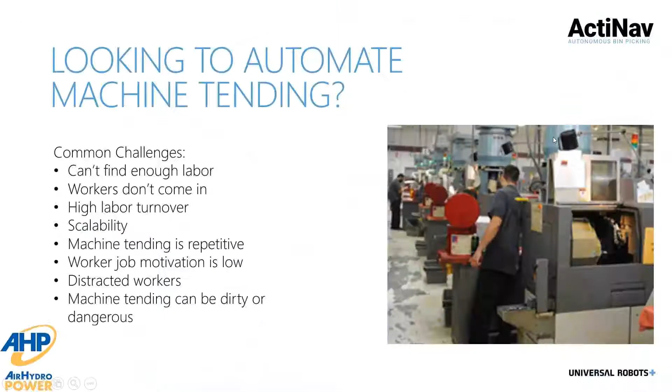So basically, what we're looking at is applications where people are wanting to automate machine tending. A big problem these days: people can't find labor, workers don't show up, or people come in, get trained, and leave to go somewhere else. So we're looking for opportunities where these situations are common, and we want to take over the boring and repetitive tasks.

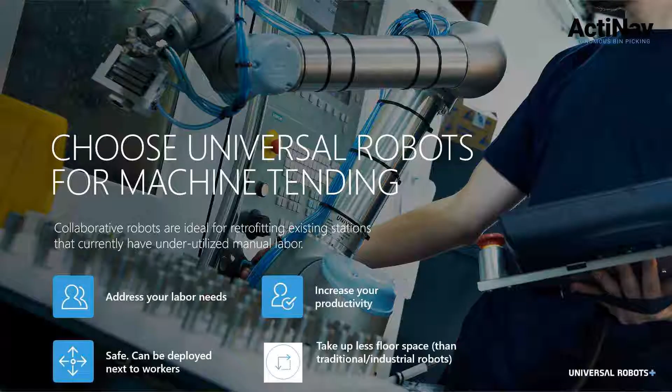So for example, we've got machine tending, CNC machines, other types of automated equipment. Universal Robots has been working in this realm for quite a while now, and basically what we're talking about doing here is moving things from point A to point B. Point A being a little bit more complicated since we're picking parts out of the bin, but point B is still the same, and robots are really good at doing that type of stuff.

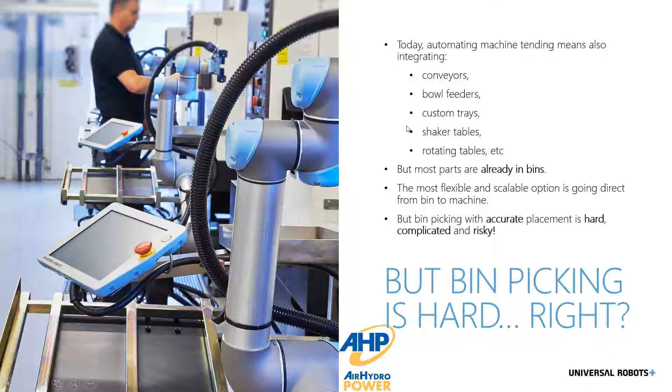So the traditional thought is that bin picking is hard. Well, Universal Robots partnered up with Energid and has done a spectacular job of making this simple. When we talk about picking parts out of a bin, we may be placing them onto a conveyor, or maybe replacing a bowl feeder or custom trays and things like that. But as parts are typically manufactured, they're going to end up in a bin at some point or another. So the process of taking parts out of a bin and putting them into a machine can be somewhat redundant, boring, and repetitive. We're looking to take over those applications.

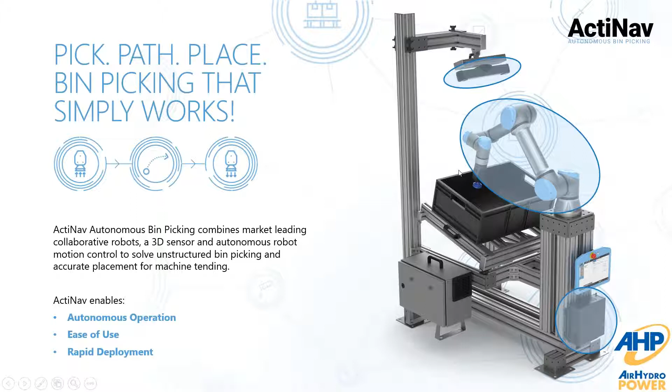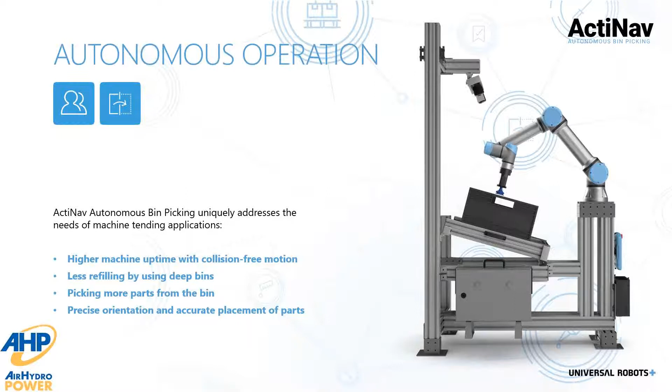ActiNav is billed as autonomous bin picking. So essentially what that means is we're functioning as a standalone system. We don't have to have operator intervention, but it's also easy to work with. ActiNav autonomous bin picking combines market-leading robots, 3D sensor technology, and automated motion control. That's where the magic really comes in, the automated or autonomous motion control. There's a lot of complicated math that happens, but essentially the end user doesn't have to worry about that, and it's not something we really have to get into to get the system up and running.

Some of the benefits are higher machine uptime because of the collision-free motion, achieved by teaching the environment the robot works within, so it knows what components to avoid hitting, as opposed to, for example, the framework, the camera, or even the bin itself. Another advantage is less refilling frequency. Depending on the size of the parts, we like to use deep bins, so every so often the operator comes over and dumps more parts in the bin, and the robot can keep doing what it does.

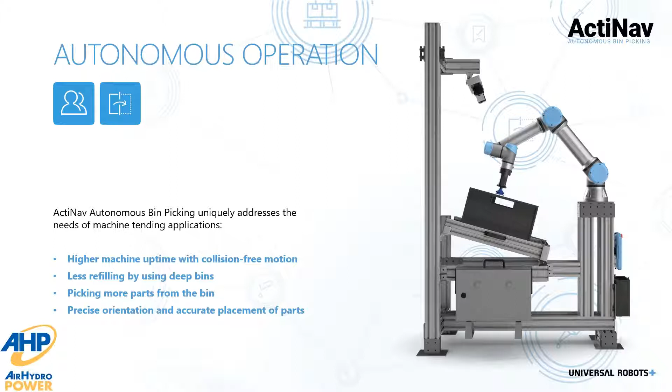Also, we do a pretty good job at clearing out the bin. The system is not going to totally empty the bin, but we are going to get most of the parts out. The example I'll show you shortly, I let it run all the way to the end, and I think we had just about 5 or 10 parts left in the bin.

Another nice feature we have here is ease of use. Traditional bin picking systems required a lot of external equipment for programming. All of our programming is done on the Universal Robots Teach Pendant, plugged in as a UR cap in a familiar Universal Robots environment. So it's very easy to work with.

A real important aspect is defining the environment, and this process is made very simple as well. We have to define where the bin is that we're picking parts out of, and then we talk about the part itself. As Mike mentioned, in order to do a trial, we need sample parts - we like to have probably 20 or 30 depending on their size. It's also important that we get a 3D CAD file for the parts.

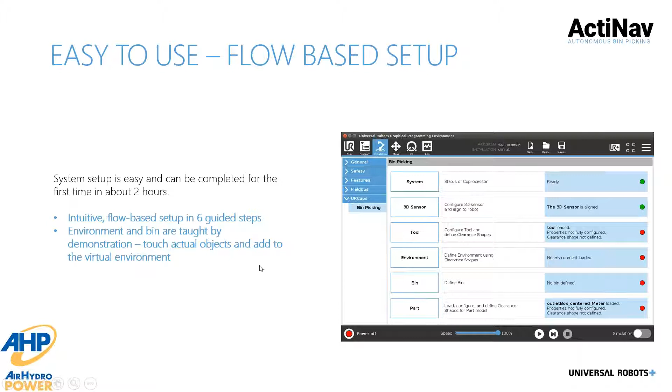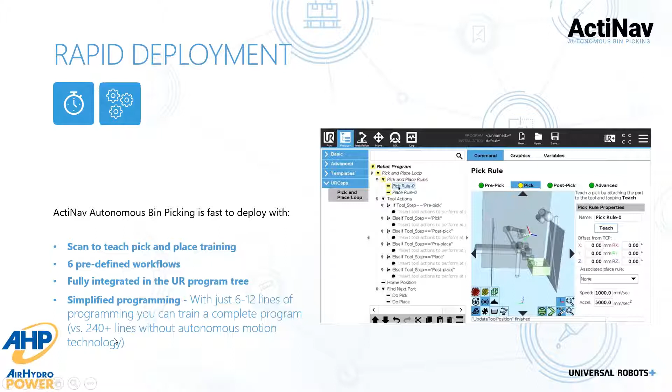So rapid deployment - basically, we attach a part to the end of arm tooling, scan it with the camera, tell it where we want to pick the part, different pick orientations, and how we want the part placed in the fixture. The robot figures everything out from there. The actual robot program is typically 6 to 12 lines of code. Previous, more complicated systems, you're looking at well over 200 lines of code without that autonomous motion module to help us out.

So teach by demonstration - that's one of the things that's very useful and nice to work with on the Universal Robots, as everything is done by demonstration. You move the robot into position by hand using the free drive, and you teach that.

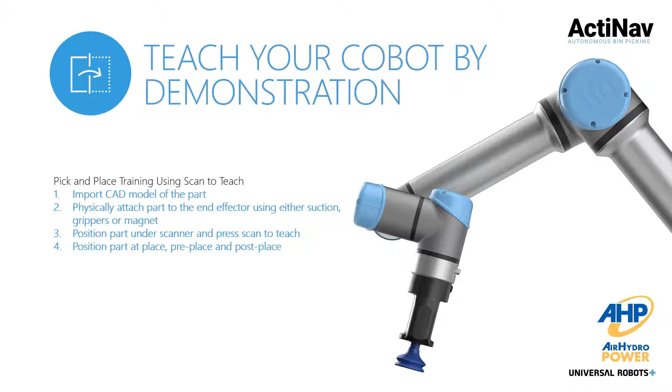And we do a similar type of arrangement with the ActiNav bin picking system. We attach a part to the robot and present it to the camera, take a picture, and confirm it's oriented properly. Likewise, once we place the part, we place it in position and teach that position, and it handles everything from there.

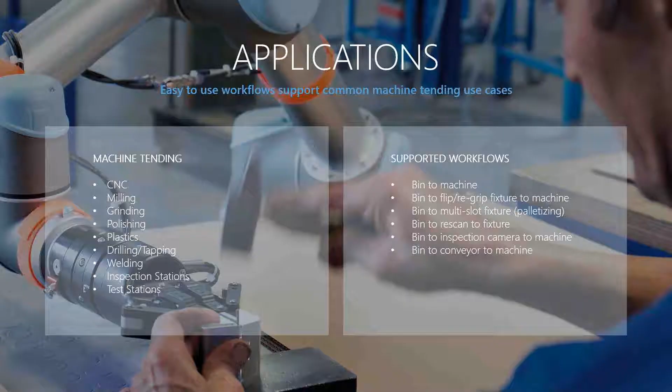Typical applications: CNC machine tending, milling, grinding machines, polishing machines, plastic injection molding machines - for example, placing cores into a plastic injection molding machine, drilling and tapping systems, welding. A lot of times you're picking parts out of a bin to place into a weld fixture, or even inspection stations, presenting parts to a camera for inspection and then placing them in a pass or fail bin. All this can be done fairly easily.

Some of the options we can do: pick from the bin and place it directly into a machine. Some other unique things we can do - we can actually regrip. So if we pick a part out of the bin and it's not in the orientation we need to place it into the machine, we can place the part down in a regrip fixture and then pick it up in the proper orientation, because some parts will end up in the machine or bin in multiple different orientations.

We can also do a rescan. So once we pick the part up out of the bin, we can make sure that we have it appropriately collected before we place it into the next fixture.

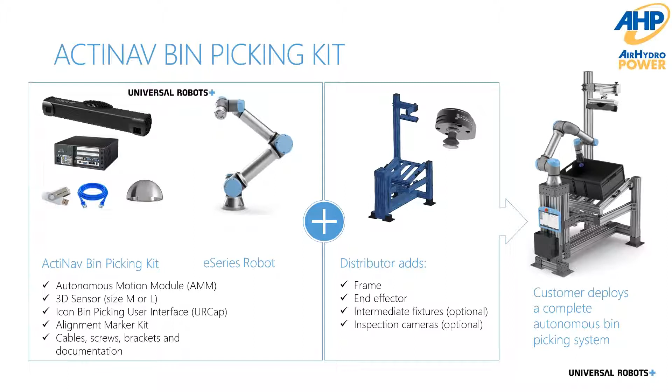So some tech specs. When we're picking parts, we typically can only pick one single type of part out of the bin. We don't have the ability to sort parts at this time. As mentioned previously, suction, vacuum, magnetic, or internal gripping.

The camera has to be fixtured in a fixed location above the bin. We can't have the camera moving around. Cycle time, currently we're at about 10 to 20 seconds part to part. There's some improvements in the works for that. And then placement accuracy, we're looking at plus or minus 3 to plus or minus 8 millimeters, depending on the application.

Part size, we're typically looking at about a 15 by 15 or 20 by 20 part. We can work with some flat parts, and then bin sizes, of course, you can see typical bin sizes depending on which sensor and robot we're working with. And there's all the standard universal robots payload restrictions that will apply.

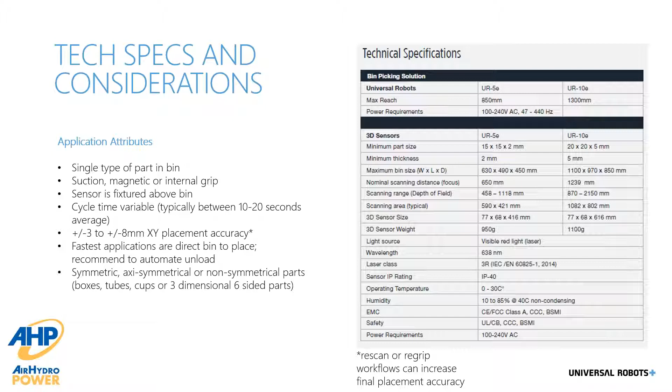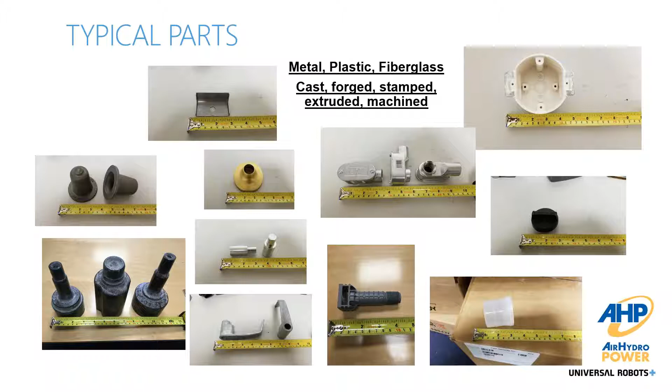Here's some typical parts. So we've got stamped steel parts or electrical boxes. These pull elbows are what we actually have loaded into our demonstration system that I will show you here shortly. Some other cast parts, machine parts. So basically anything that even has a more complicated shape, we can still scan and pick these parts out of the bin. But typically, if you think about it, something 4x4 or smaller is our target product size.

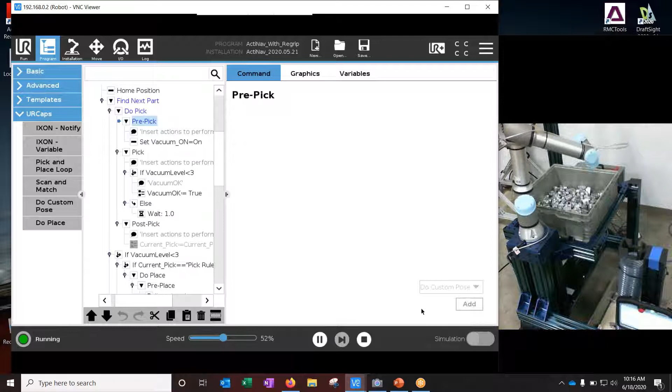All right, so what we have here, this is the actual Teach Pendant Live, and then we have a live camera view of the robot itself. Get everything lined up here. I'll go ahead and start it up so you can see it in action.

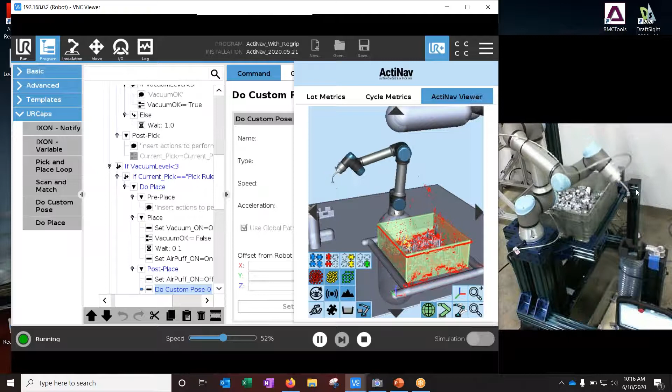Basically the camera is going to take a scan of the bin and see which parts are most viable to be picked, and starts calculating. It actually does multiple calculations at the same time, from the pick location to the place location, and whichever one completes first is the one that it executes. And it continues calculating while it's actually executing the moves. That way we can continue on without a whole lot of processing time in between picking and placing parts. And occasionally it does miss a part.

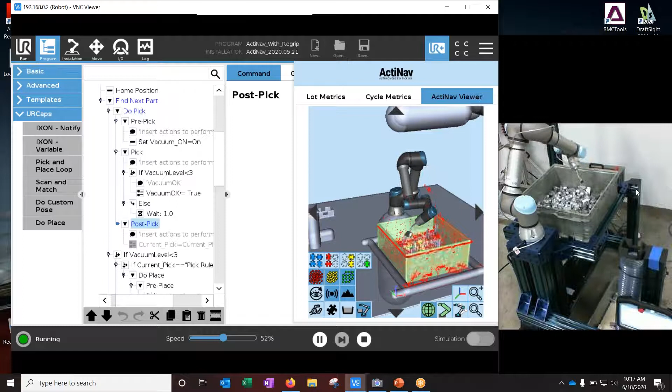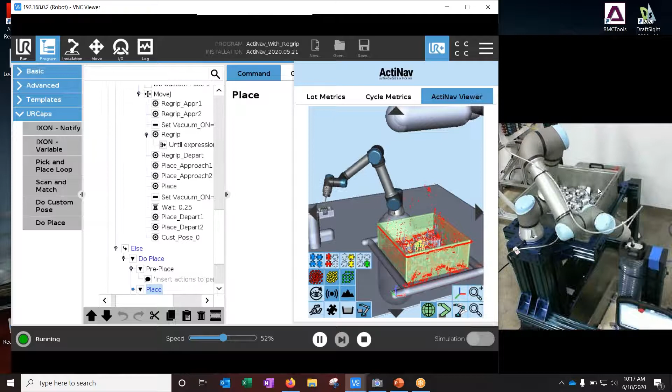This particular part we're working with has some texture on it, so I need to look at a different vacuum cup for this application. But we have the ability to verify that we have or have not picked the part. You will notice that last part, we did do a regrip situation where the part wasn't in the orientation that we expected it to be in for the fixture.

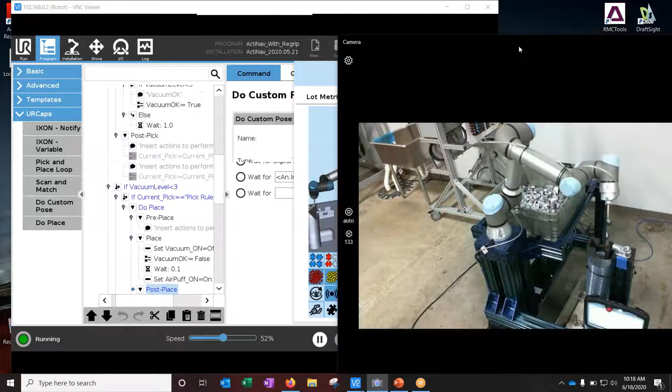Another thing I'd like to note as well is that you will not see the same path repeated every single time. The robot does calculate a unique path for each situation. So here we have a regrip situation going on. It's going to come over to the side, grip the part, and then place it into the bin.

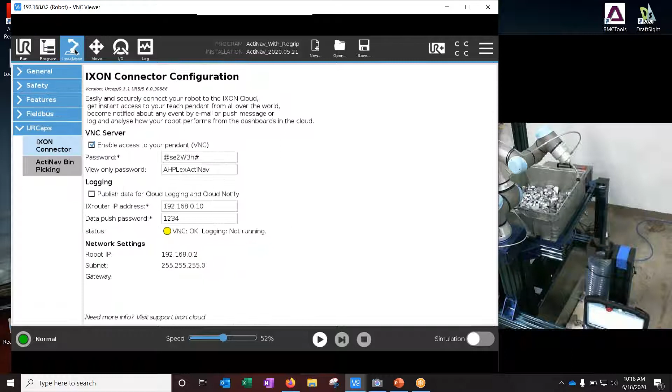So real quick, just to go through some of the setup of this system. Of course, like I mentioned before, this uses the standard Universal Robots interface. And so underneath the ActiNav bin picking, we've got several different modules.

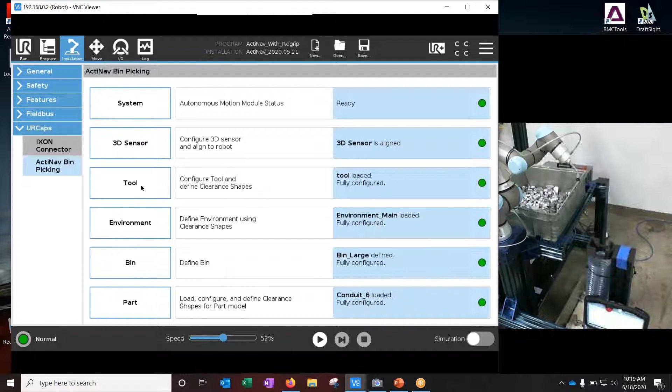For example, the 3D sensor, there's an alignment wizard, and essentially we attach that dome-shaped tool and move the robot into various orientations and have the camera take pictures of each of those. And then the motion module will look at the robot position and compare that to where it actually sees the dome-shaped device, and comes up with all the necessary calculations to make sure that's in the right orientation.

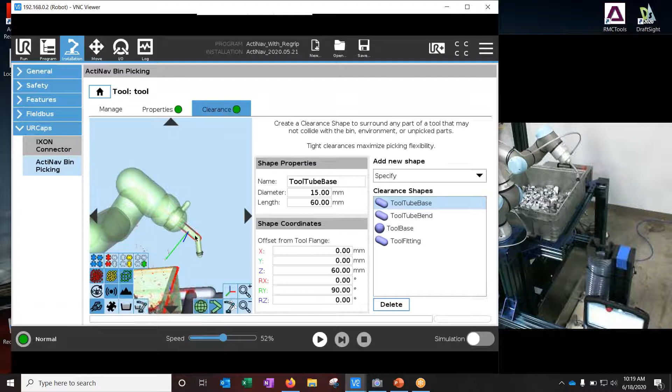Likewise with the tool, we like to have a 3D file for the tool itself so that we can have an accurate representation. As you can see, this is the same tool that we have on this system. One of the things you do as well is actually define clearance areas around each component, and that is used for the collision avoidance in the path calculation. It's a real simple process—you've got just various different shapes that you define for those clearances.

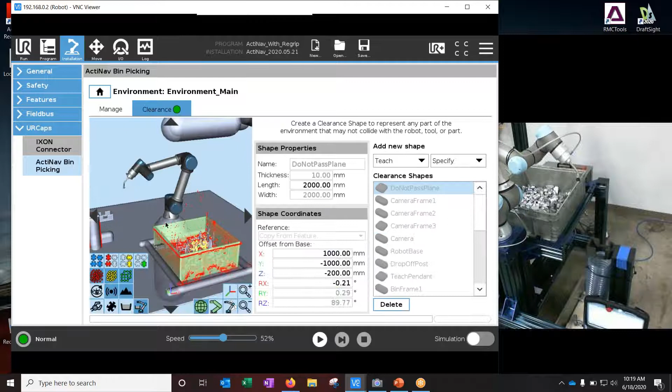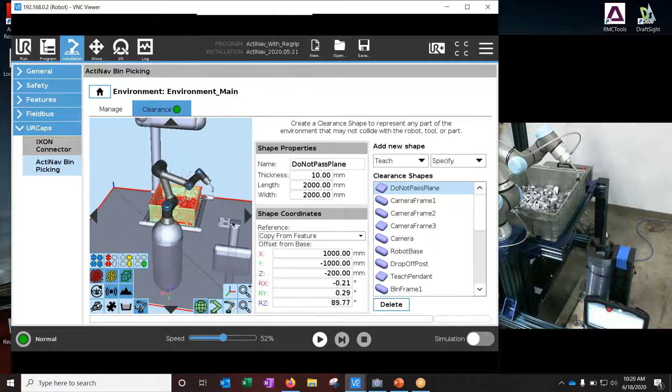In the environment, we have to tell the robot what kind of environment it's working with in order to avoid colliding with any of the surrounding equipment. So in this example, we'll turn this around so you can see a similar orientation to what we have here. You can see the robot.

The base of the robot, the drop-off post, the bin itself, and the framework. And then up top we have the actual camera. I'll move the camera so you can actually see that mounted up on top of the frame there.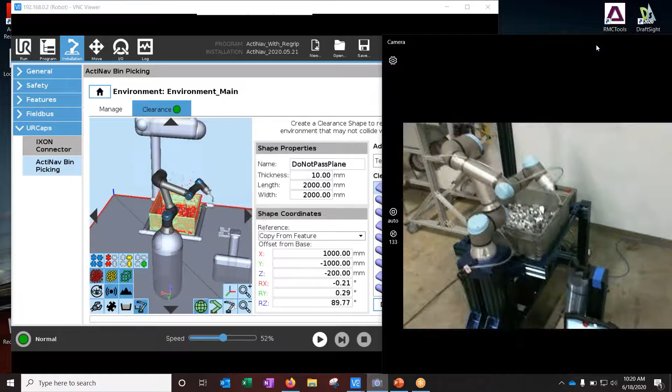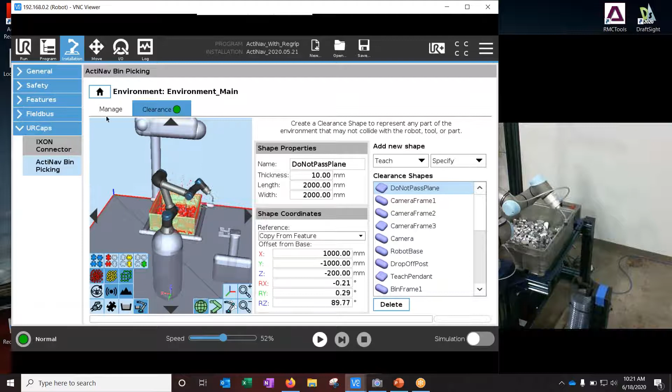Get this back in place. There we go. So we teach all these items, and then you can expand or contract the clearance zones in order to give you a little more space. For example, we've got this hose hanging off of here for the vacuum, so we want to make sure that doesn't get hung up on anything. So it makes some of these clearance shapes a little bit larger than what they physically are.

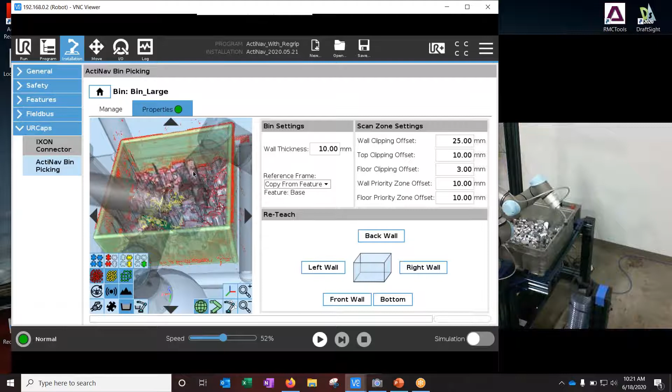For the bin, we have to define the bin that we're picking the parts out of, and it's a real simple process. Using the vacuum tool that we use for picking up the parts, we actually touch off 3 points on the inside of each wall and the top of each wall, for all 4 sides of the bin, and then we also touch off on 3 points on the floor of the bin. Then we define how thick the wall is and how far down close to the floor we want to be able to pick the parts from. That's a fairly straightforward process.

And finally, the parts. As you can see, we've got a 3D CAD file for the part, and it's important to also define clearances around the part as well. In this case, we just did a big single bubble. For a more complicated part, we might want to change that to consist of several clearance shapes. But again, that is utilized to avoid collisions during that path calculation.

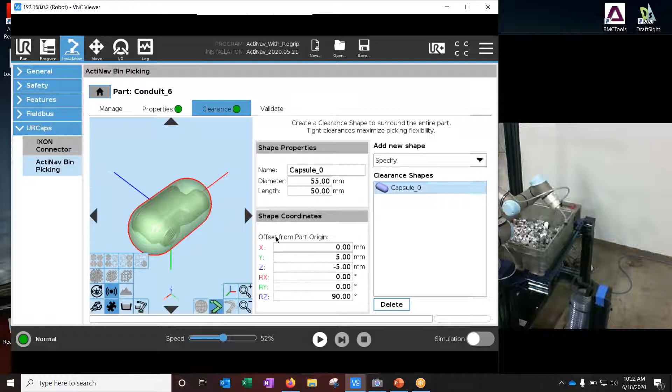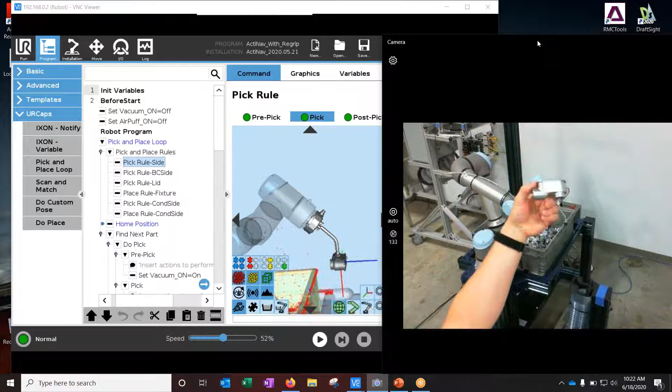So that's the initial setup of the system, and then we get into the actual program itself. It's pretty straightforward. You define pick and place rules for each orientation that we want to pick the part up. Again, we're working with the conduit pull elbows, and there's multiple different ways we can pick these up with the vacuum. So we've defined several different pick rules: one for the side, the flat side, one for the barcode label side, the lid, and then we've also got one for the conduit side.

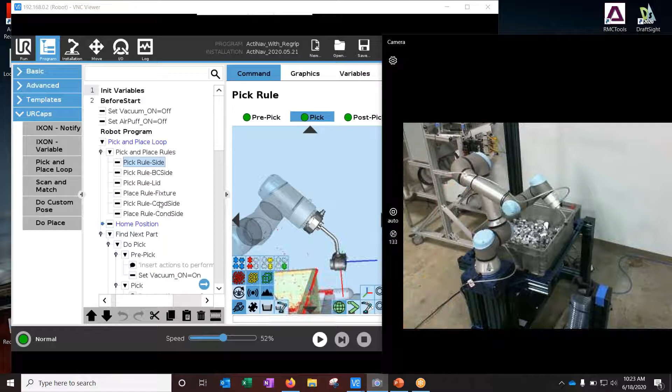So when you define these pick rules, you basically attach the part to the robot using the vacuum and take a picture. You hit the teach button, and it actually takes a scan to verify the part is actually oriented on the tool as you would expect it.

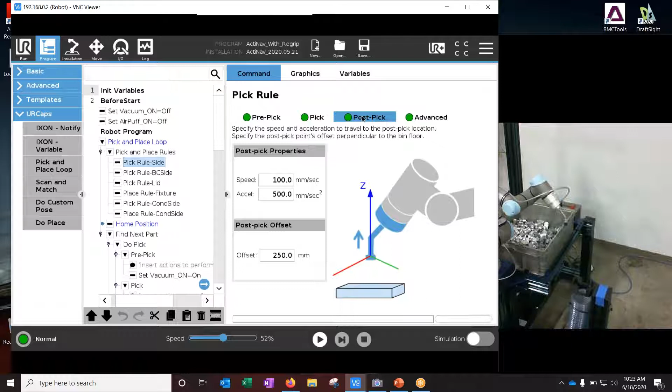Then you simply define, once it has gripped the part or vacuum attached the part, how far up you want it to move in the Z direction of the tool. In this case, we just tell it we want it to move 250 millimeters, and that gets us up and out of the bin. And then there are some other features we can adjust, such as whether we can rotate around the Z axis depending on how we have the part picked.

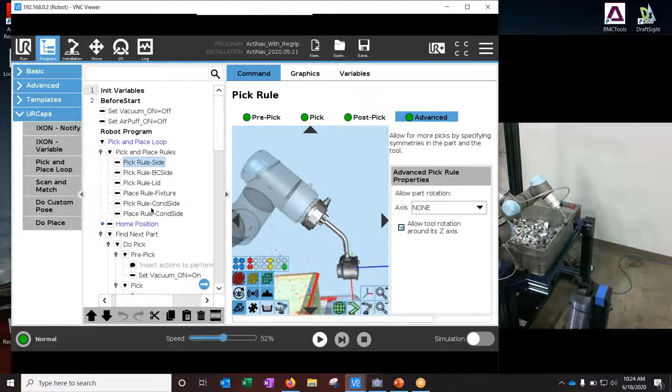And then finally, you define the place rule. This is just a simple matter of having the part attached to the robot and bringing it to your fixture and teaching that location where you want it to place. Based on that, it's going to always place the part into that fixture as you would expect it to.

Let's see. And then, during the actual program steps, so those are the rules — these are the actual motion steps. We have our do pick command. We've got some options to set up for pre-pick conditions, so for example, I want to turn the vacuum on, or maybe you would open a gripper or turn on a magnet.

And then once you pick the part, you can do a check, a part present check. In this case, we're checking to make sure the vacuum level is good. And then post-pick, we move out and go place the part. The do place is the command where we actually place the part into the fixture, and then we define, once we move into position, turn the vacuum off, etc.

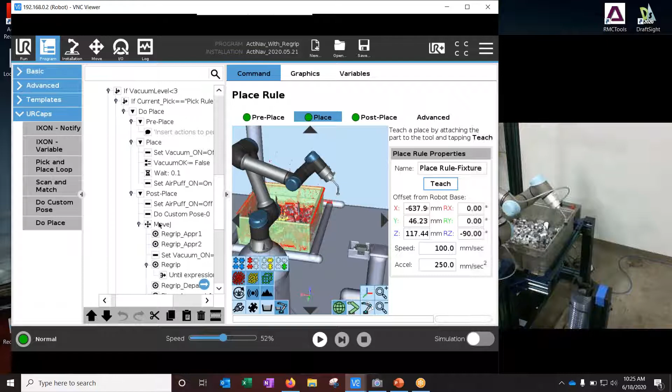Let's see, so we'll get it back to running here.

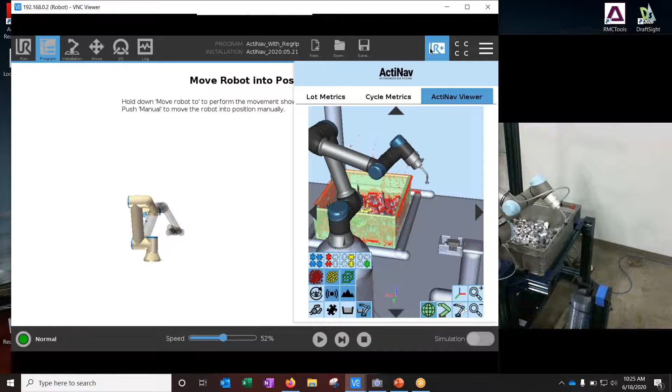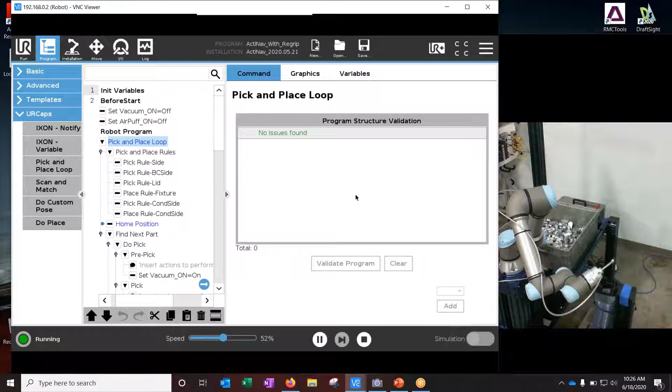When you start the program from a stopped condition, there is a slight delay because it's taking a picture. See, the laser scanner will actually fire here in just a second. And then it starts processing. That initial processing takes a few moments before it actually makes a move. And then once it makes a move, we're in good shape, and we'll carry on.

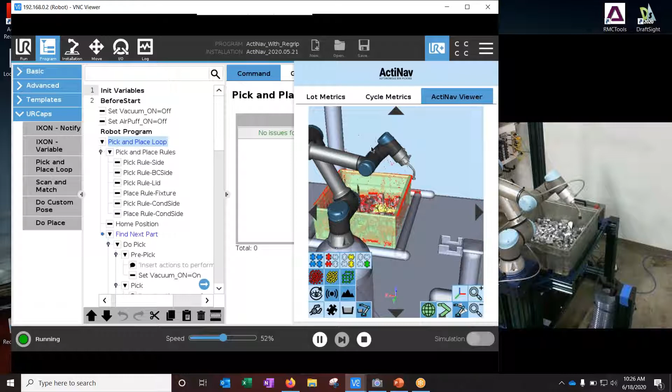Got some other things popping up here for the VNC viewer that's allowing me to show you the teach pendant on the screen here. So we've moved our home position, take a scan, and now it's calculating, and you will see a ghost image of a robot moving around. So those are the actual calculations that it's coming up with to make these moves. And of course, first move was not a good pick, so we'll regroup and take another shot.

So how are we looking on the chat? Do we have any questions on the chat so far? Okay.

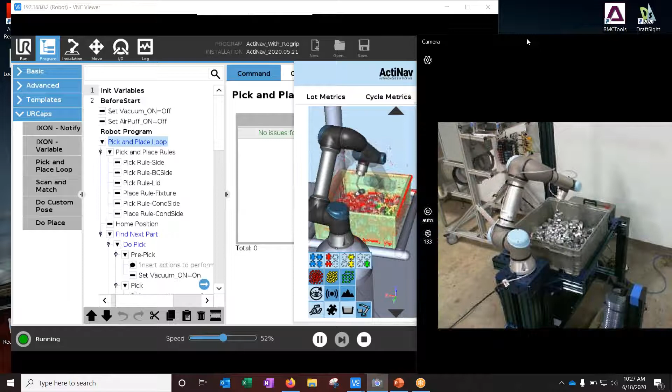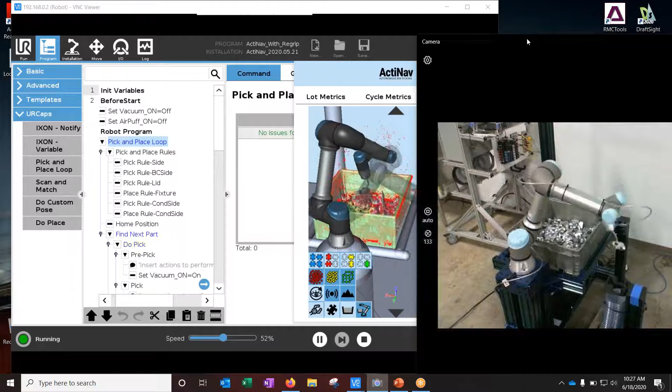That's essentially what we wanted to show everybody. I hope this has been a worthwhile adventure. As we mentioned at the beginning of the presentation, we would love the opportunity to take a look at your applications. Send us some sample parts. 3D CAD files are always helpful. If you don't have those available, we have some options to get the part scanned, but we would definitely prefer to get the native 3D CAD files from you guys. So send us your parts and let us take a look at them, and we'll help you automate your processes and get up to speed and keep your factories running.

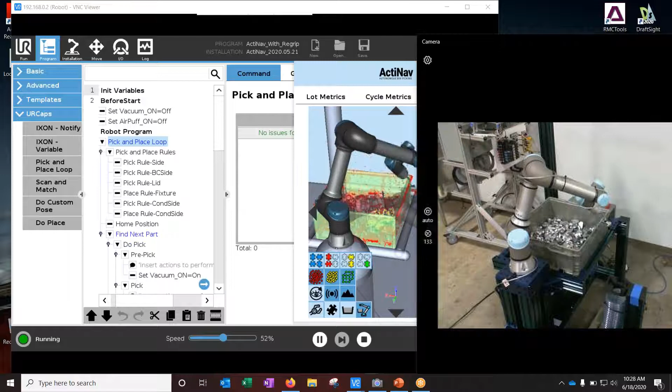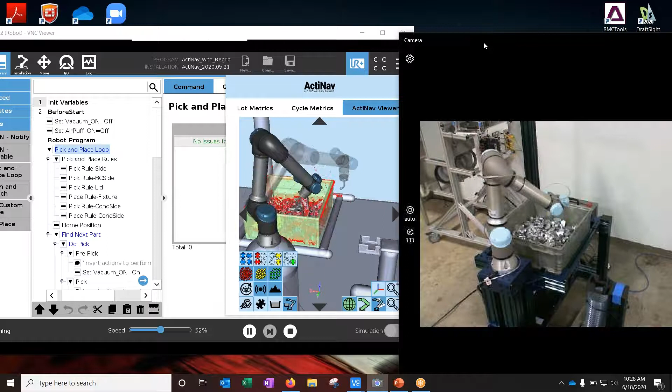Just wanted to reiterate a couple things that Andy said going through his presentation. Probably the first and most important thing is the ease of use and fast deployment time. You can see that all of the setup for this system is done right from the teach pendant of the robot. So once we have parts and a model, and a model of the end of arm tooling is also helpful, all of this is done right from the teach pendant, really totally conforming to the ease of use message that we deliver with Universal Robots.

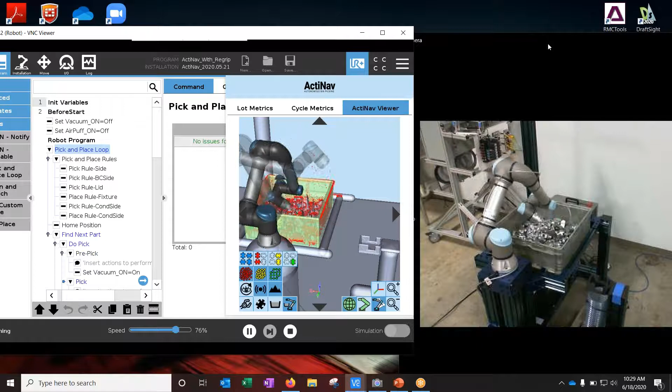The other thing that's really worth mentioning is 3D picking the part out of the bin is really the easy part. There are several companies out there doing that. What ActiNav has really done is the path planning to avoid collisions with the environment, the bin, the post, and the robot going into singularity, and that's really the business that Energid was in before they got into this. So they're calculating the mechatronics of the robot all the way through on every pick, for 5 different possible picks on every cycle.

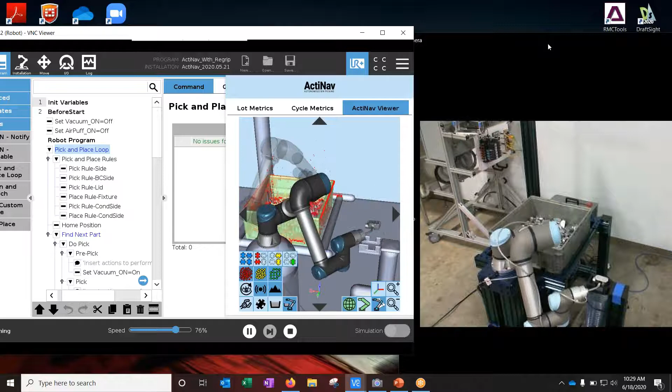And I know Andy's got the robot slowed down just a little bit here for the demonstration, but the system can definitely run quite a bit quicker than what we're running here. So I see that there's a question here from Lucas: what does the robot look like at 100% speed? I knew that was coming. He's speeding it up there to 100%.

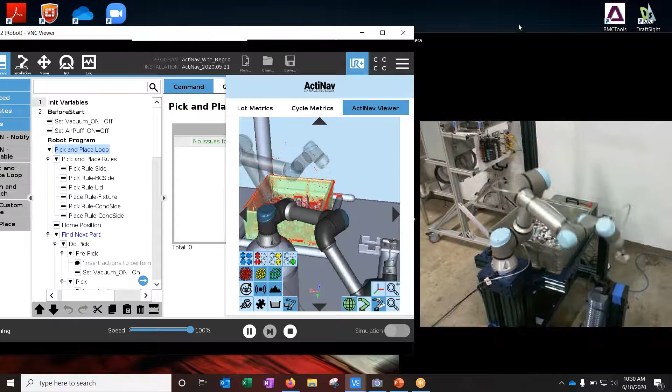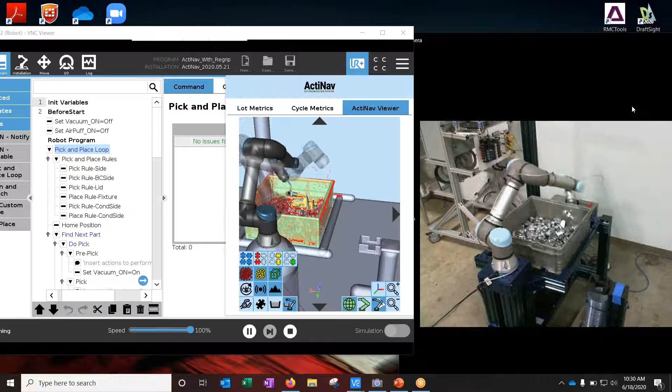So ideal applications as the system stands now are going to be around the 10-second cycle time. There are improvements being made, as with Universal Robots and their quarterly software updates. I think ActiNav is actually on that same plan to update software quite frequently and add features and also speed.

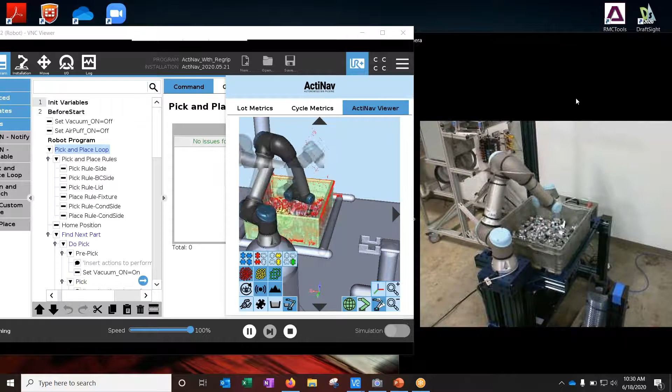David's got a question here: has anyone approached you guys about looking into our camshaft raw material loading at TMMK? Yes, actually, last year someone approached us about that application, and we'd definitely like to revisit it. Naturally, this system was out in beta form at that time, and I think now it's something we really need to dive back in and look at. So, David, if you don't mind, let's you and I and Steve get together and see what we can do to get some sample parts and a model and see if we can prove some things out.

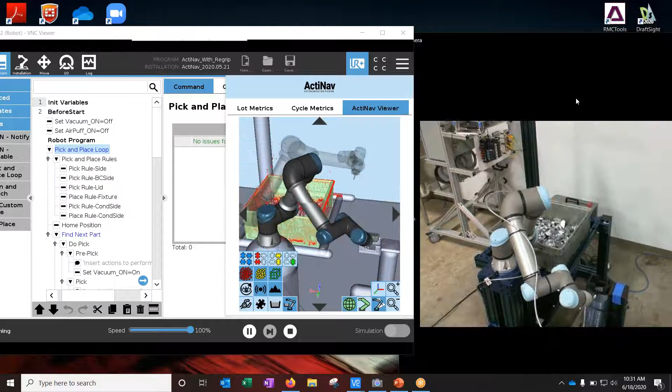Great. Do we have any other questions? I don't want to keep you guys any longer than time allows.

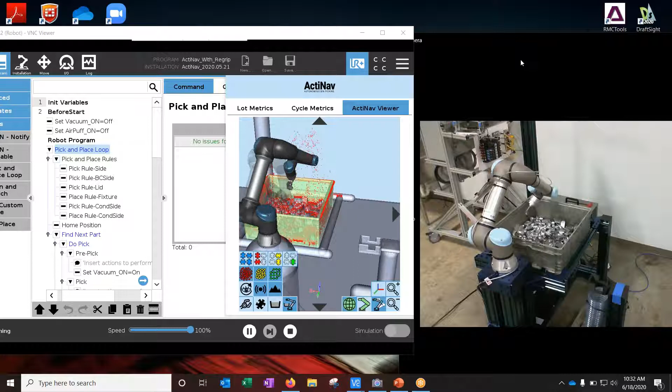Actually, we have one question that just came in: have you done any applications installing bolts? I don't know that we've actually done any installations installing bolts, but I don't see any reason why we couldn't. As far as picking the bolts out of a bin, it definitely sounds like something that's doable. I guess we'll have to take a look at the bolts and see what they look like, and then picking them out and placing them, I would imagine, straight into a cylinder head or something like that. Yeah, we'd definitely love to take a look at that application, Rick.